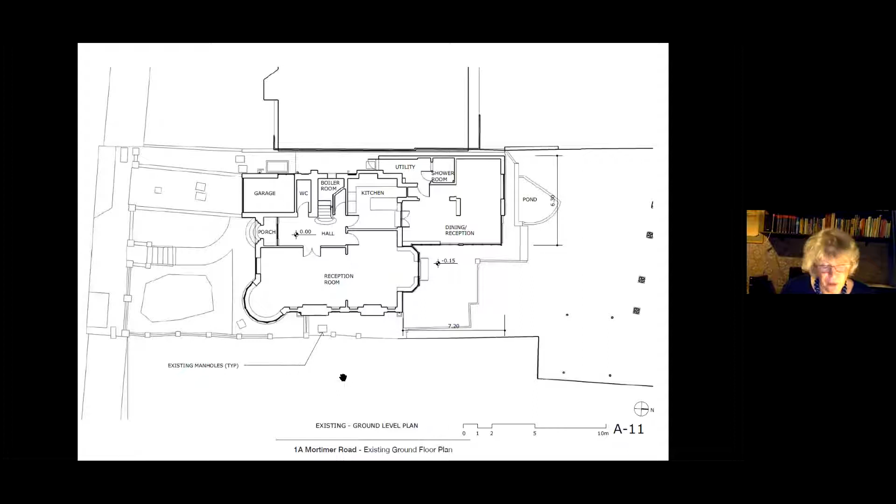This shows the building as it was, with the old rear extension here at the top right. The fact that this was north facing meant that the challenge of the brief was to introduce a sense of light and airiness to the design and to bring the garden into the house and the house into the garden, and to make that work throughout the year.

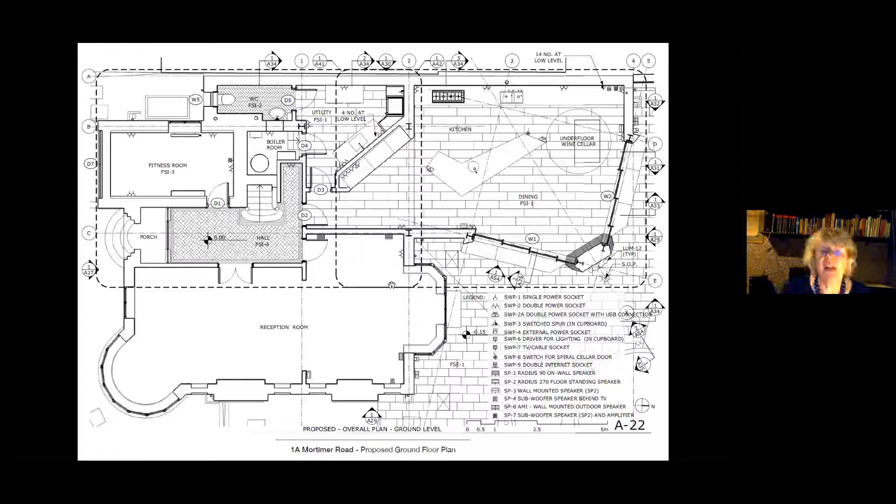The plan for the new extension shows the kitchen and dining area here at the top and extending into the garden, and you can see the way in which the paving has been used within the house and outside to unite the inside with the surrounding garden area.

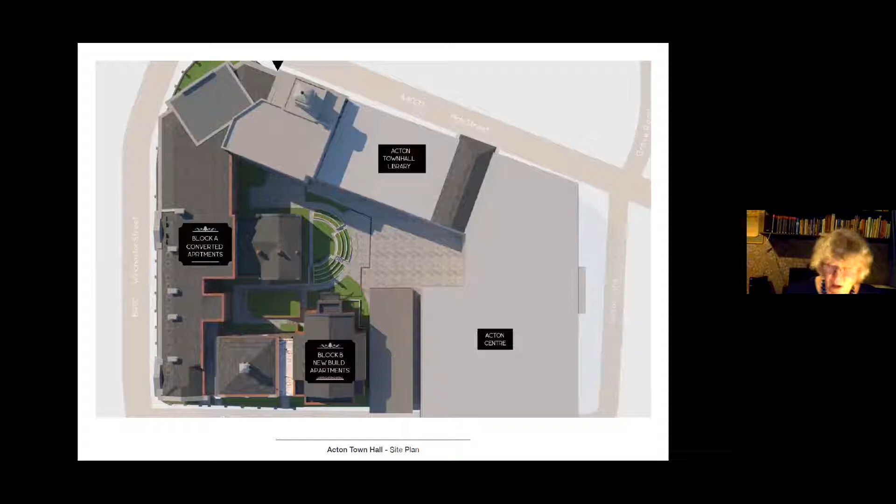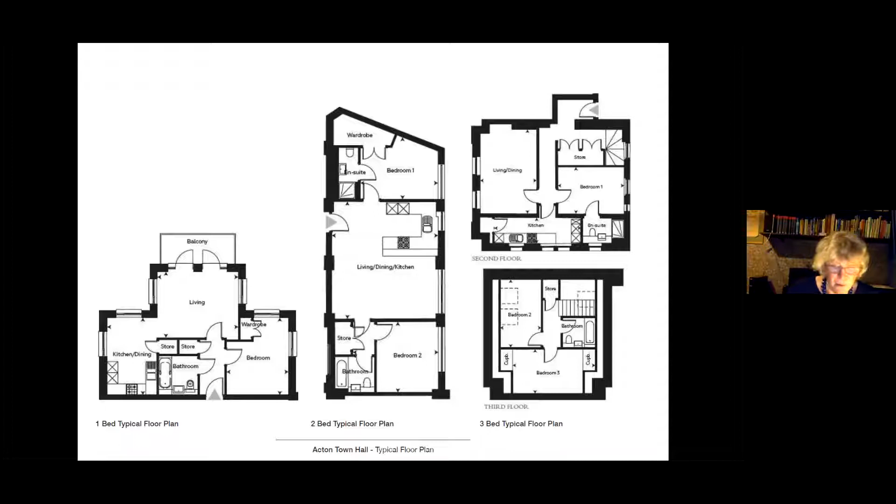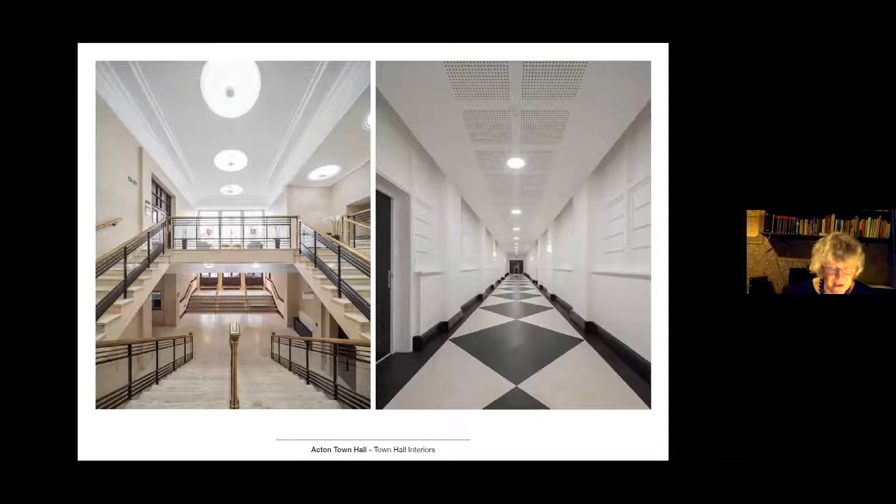These images show the splendid communal spaces of the old town hall that have been retained and restored. Particularly on the left, the grand staircase that formerly led to the theatre, council chamber, interview rooms, and committee room.

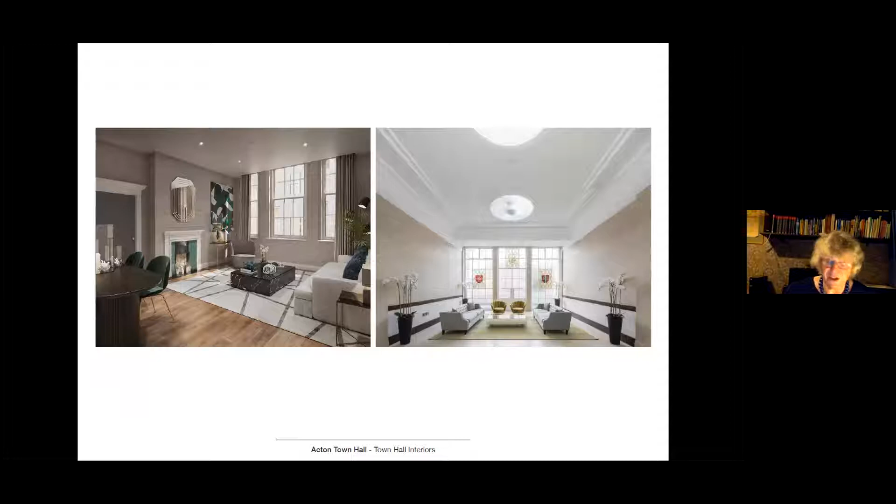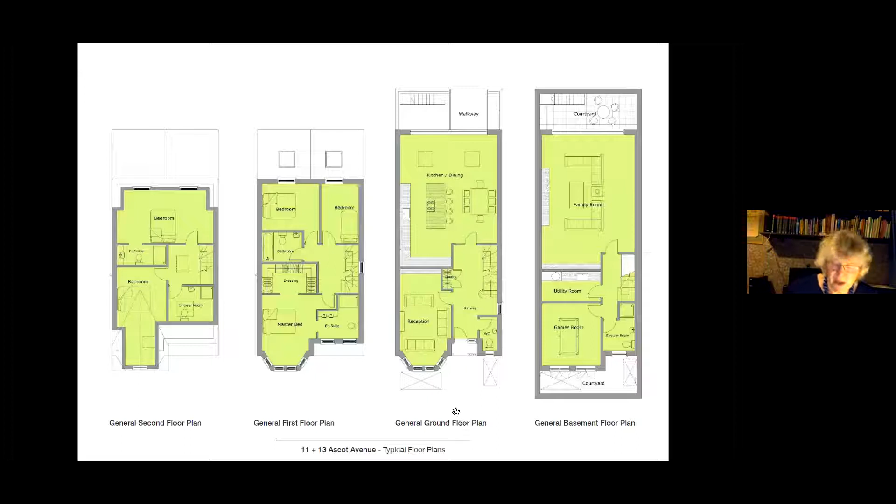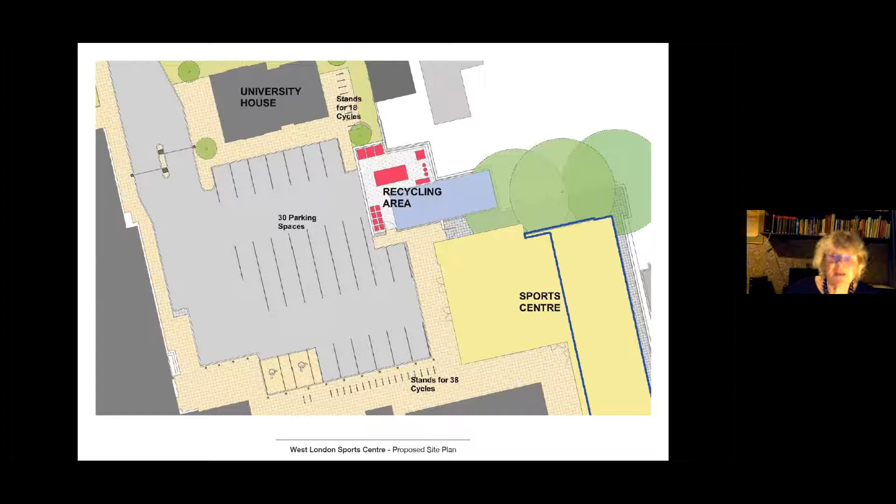So the building minimises its impact on the surrounding residential properties. But in scaling down, the facility now focuses on personal fitness facilities, and the team sports capacity is being accommodated elsewhere off campus. The plans here show the two floors of the building.

On the left, you have the ground floor plan, which shows the reception, arrival space, gym, access to studios and fitness spaces. Then on the first floor, you've got changing facilities for males, females, and disabled use.

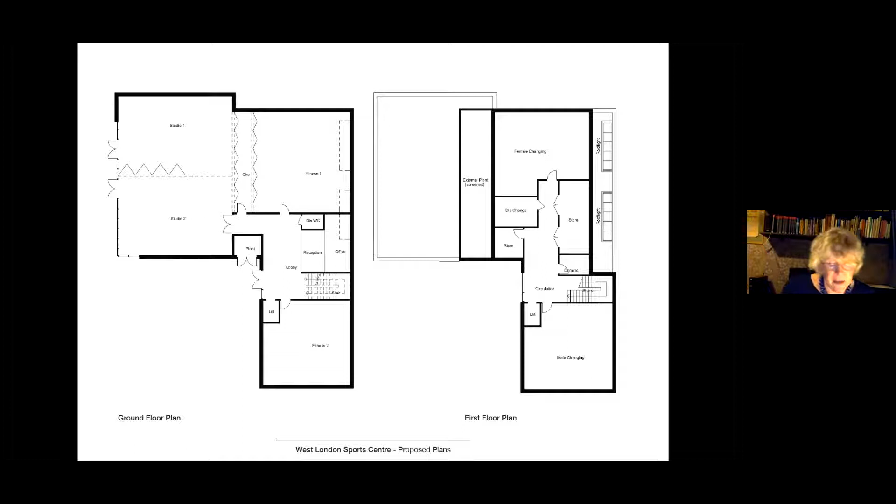This cross section shows how the new Kerrison building, shown in pink here, which had already been constructed, has been reconfigured to provide sports facilities. The new build extension to the left has, as it were, extended into the car park area.

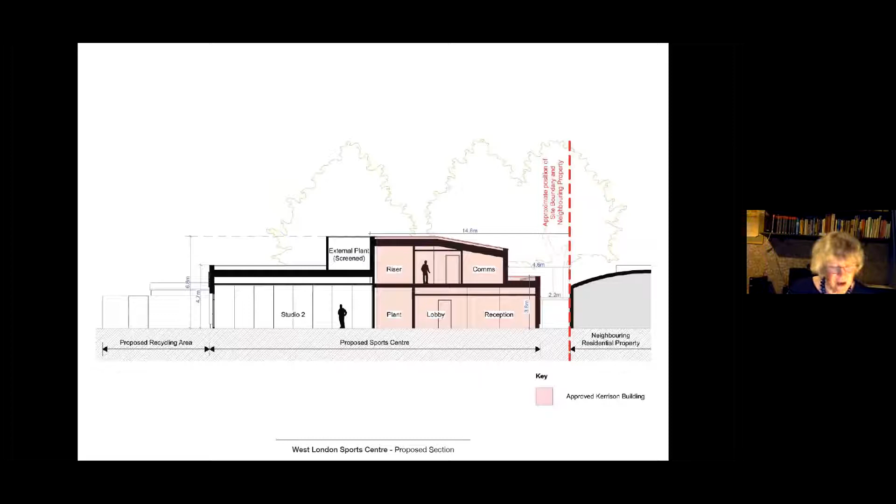The judges liked the way the two-storey extension mimicked the external aesthetic of the existing university building, and reads as part of the original.

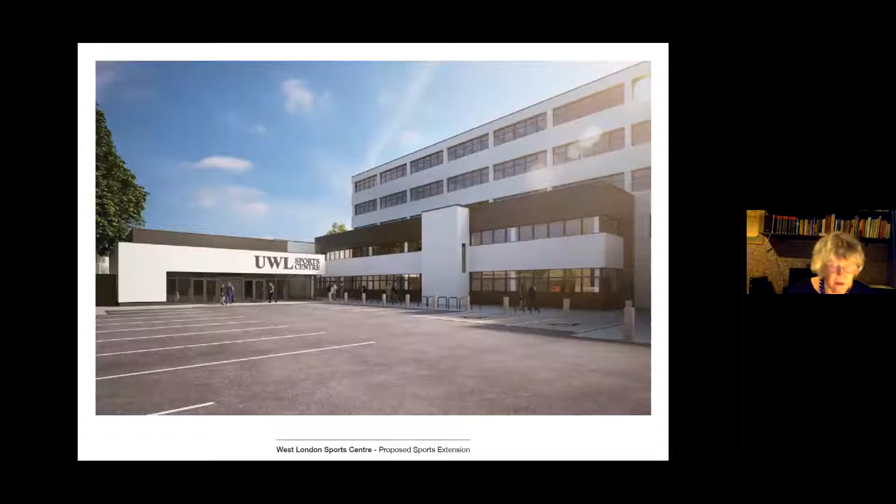There's also the direct entrance to the sports centre from the car park, which allows views of the fitness studios as you enter. Our fifth entry is the Origami House.

The brief here was for a project to reimagine and repurpose an existing garden home office outbuilding into a flexible single-storey family annex. This was intended as a starter home for a family member, but became an invaluable home office during the coronavirus lockdown.

The new build used the existing piled foundations and capitalized on that unusual layout, which ultimately led to the name for the project.

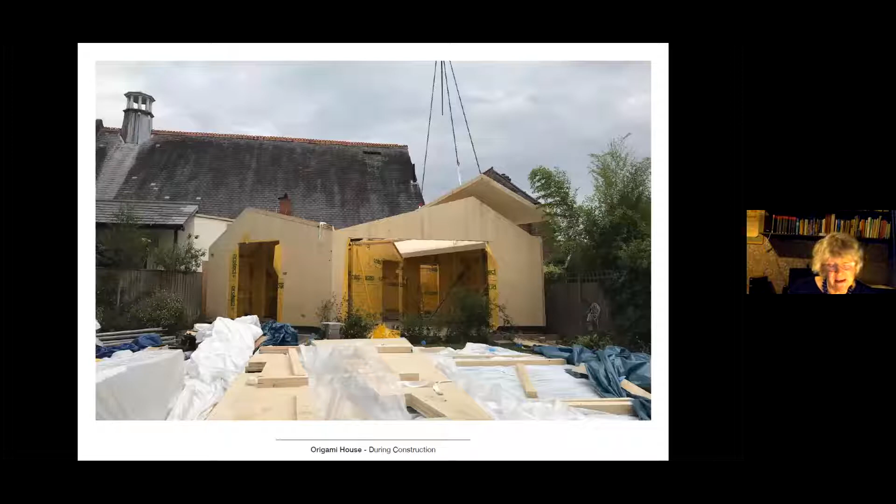This shows the construction phase. Cross-laminated timber panels were used for the roof and walls, and this created maximum height, volume, and relatively large spans, so no interior beams were required.

Here you see the CLT panels being maneuvered into place, a process which took a mere 5 days to bring in, assemble, and secure the structure.

They also bring natural light into the internal spaces, and of course, you get this incredible view, in the words of the judges, across the garden.

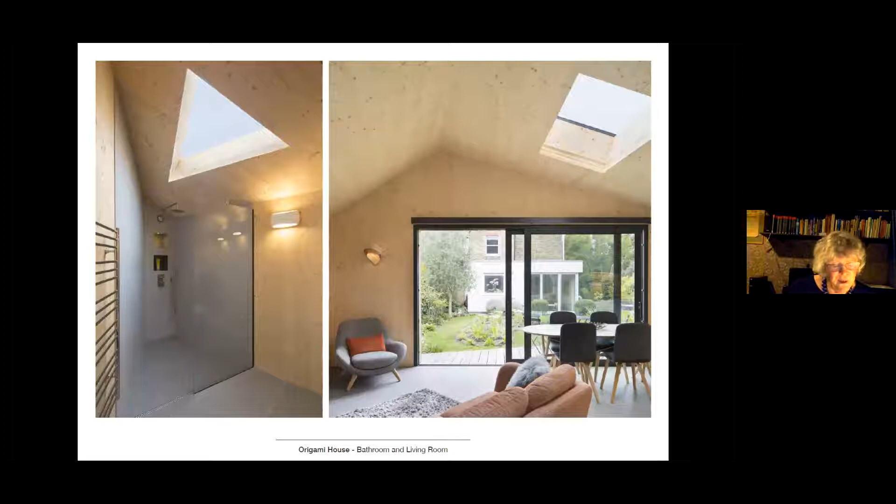Here you've got the bathroom on the left, living room on the right, and you can see that minimum internal finishes were required in the project given the beauty of the CLT structural timber, which has simply been left without adornment.

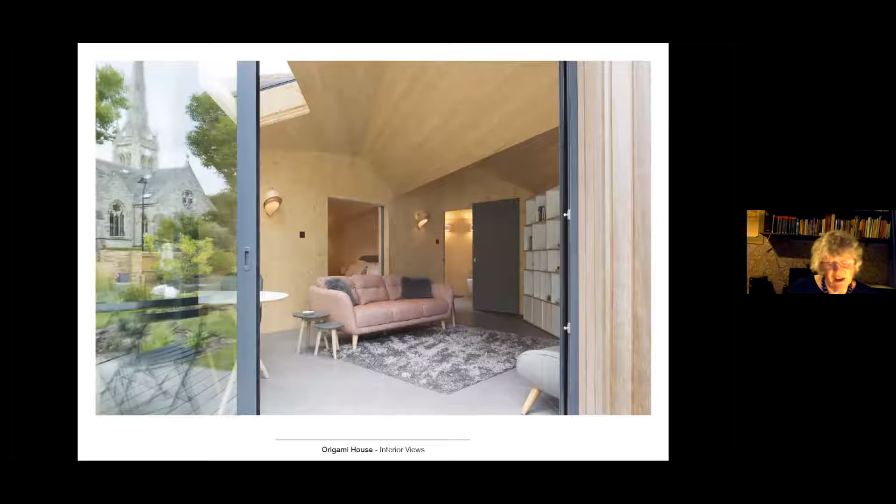A major element of this project was the sustainability standards, including triple glazing and external insulation that made this an energy efficient structure as close to passive house standards as possible.

Here is a final view of the finished project showing this link between the structure and the garden.

The judges liked the use of timber and the unique and impressive dynamic roof design. They remarked on the use of natural light and the way in which every corner of the building had been utilised to accommodate utility spaces and storage.

The brief here was to provide a wheelchair accessible extension, including a lift.

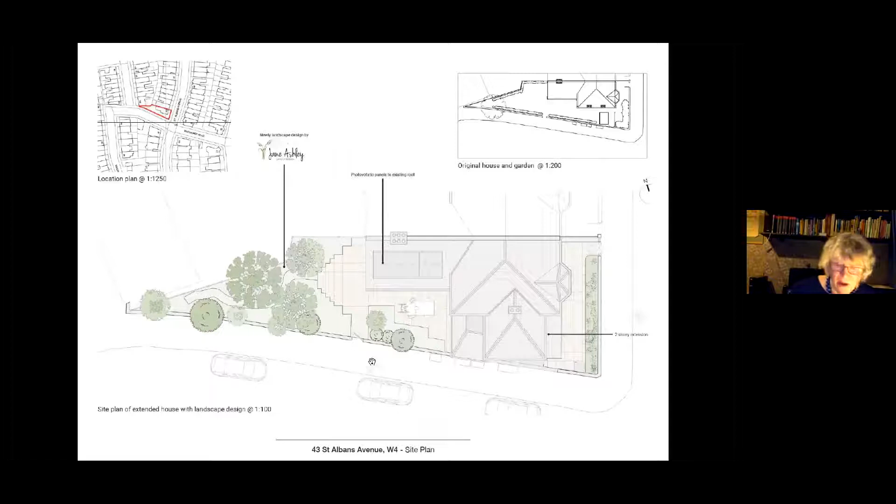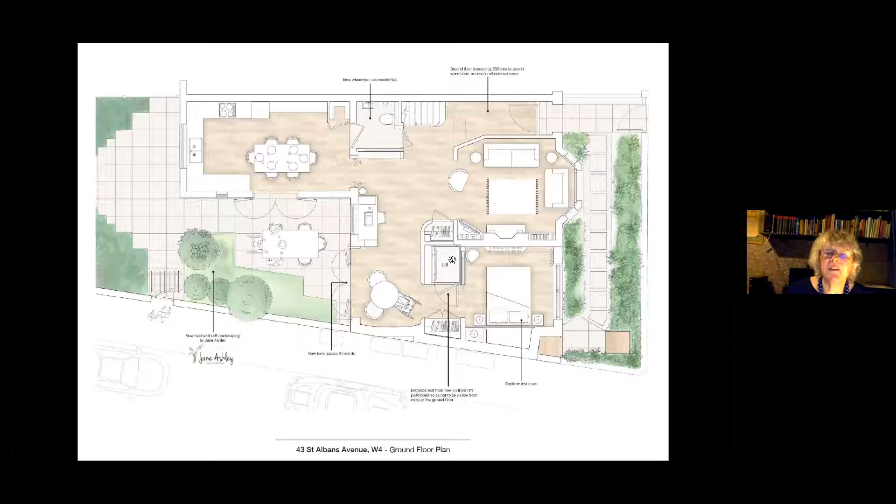In this diagram, you can see the internal arrangement of space and how the extension connects with the original house. The floor levels have been adjusted to create barrier-free access, and the new space flows naturally into the existing spaces. Here in the centre you have the lift, which gives access to the first floor area, giving full accessibility to the whole of the first floor.

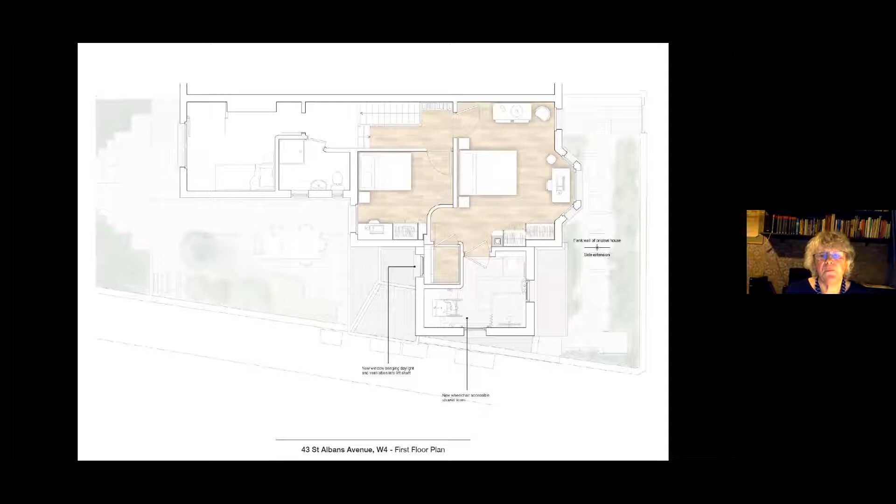A nice touch here are the three circular blind window recesses on the side of the house, which are inspired by William Morris's Red House. I think that's a building that probably resonates with a number of our members, and funnily enough, I was only talking about this building with my students yesterday morning.

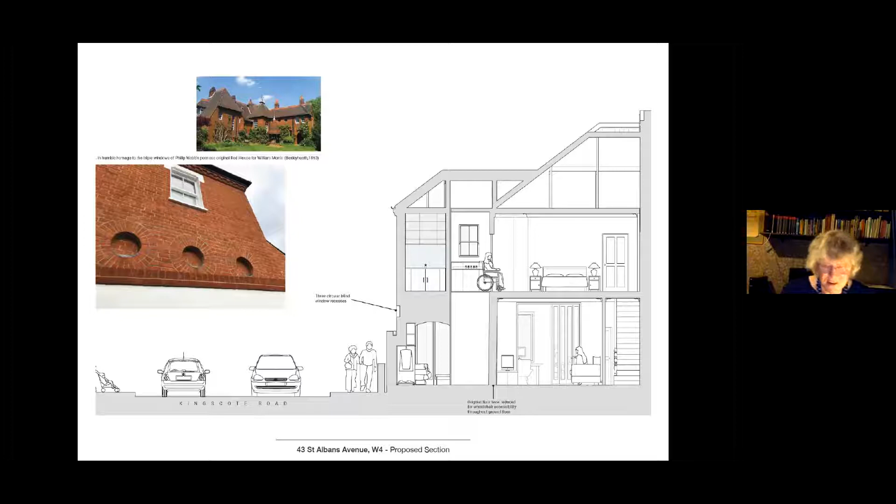Overall, the judges noted that this complete redesign of the dwelling has allowed a comfortable quality of life for the client. So next year, we hope the award will be back to its traditional procedures and the judges will be able to see for themselves the buildings that are submitted. But for now, it's back to you, Anne.

Right, thank you very much, Maggie. That has given us, I hope everybody will agree, a very comprehensive, if relatively quick, introduction to the six schemes submitted this year, all of which are, I think, of very high quality in all their different ways, and quite a wide selection.

No landscape projects this year, sadly, partly as a result of the pandemic, in that pure landscape projects such as the ones the council might have been undertaking have really not gone ahead this year.

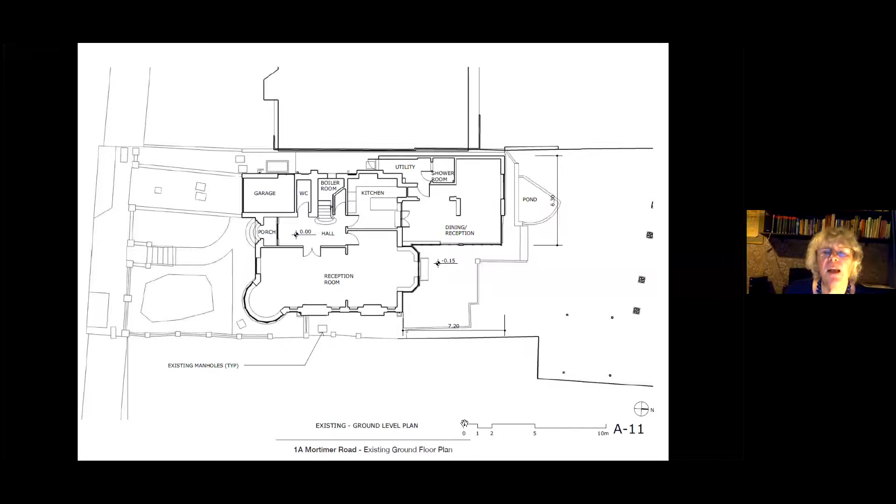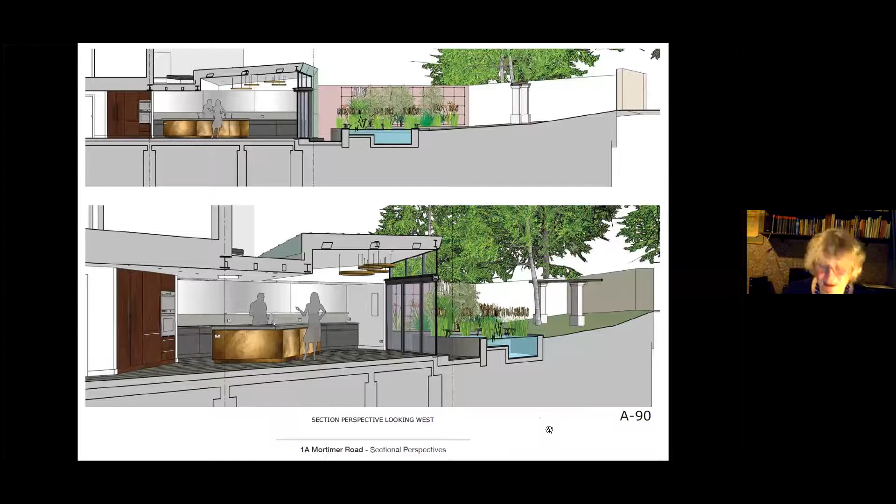This is the cross section of the kitchen and the famous ring lights looking out into the garden. And this is a more bird's eye view down of the landscape garden, the ponds, the extension, and of course the work goes on inside the house as well. Here's the famous paving flowing out of the kitchen dining area into the garden.

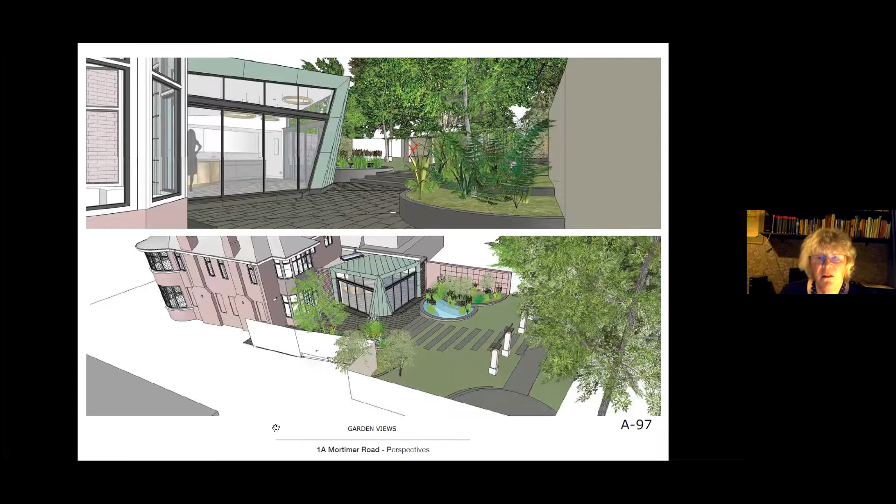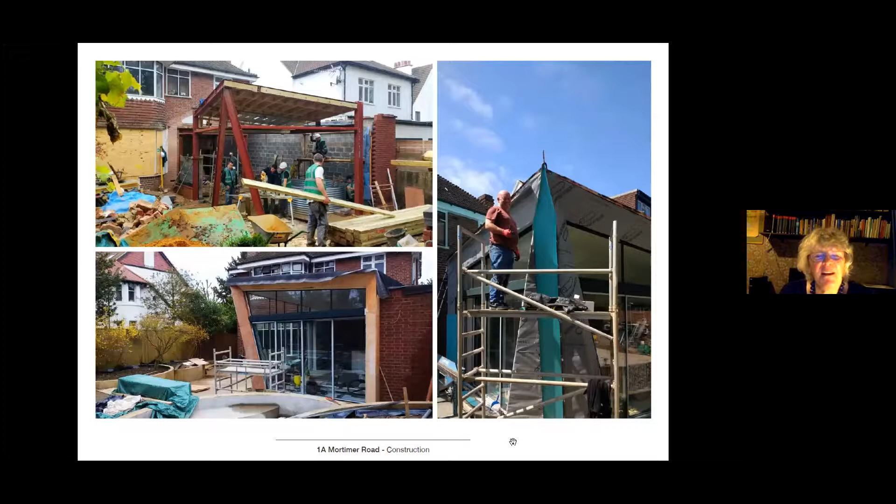This is the horrific bit, isn't it? The construction stage, when the demolition has just happened and the build is taking place. That's the kitchen with the brass island in the middle, and the famous ring lights and the echoing pattern in the garden. And that's the final slide from this scheme, showing the extension from the garden perspective.

Okay, lovely, thank you very much. That hopefully fixes it in your minds. I've had a first question: were there difficulties getting planning permission? I guess this would be for the owners to answer.

I'm still here, are you still with us? Good, yes. I think, Annie will know better than I, but yeah, there were a number of occasions back and forth with planning officers and advisors, trying to get as much of what we wanted within the scope of what would be allowed. I don't know if you want to say anything, Anya.

The planning process was challenging as it's not a straightforward extension, and it's not in a conservation area, this project, and there was no changes to the front elevation of the property, so it was all happening in the rear, which was advantageous. But even so, due to the nature of the form of the extension, it did take some persuading. We did get permission after a pre-application process, with a bit of toing and froing, and in the end we did get it.